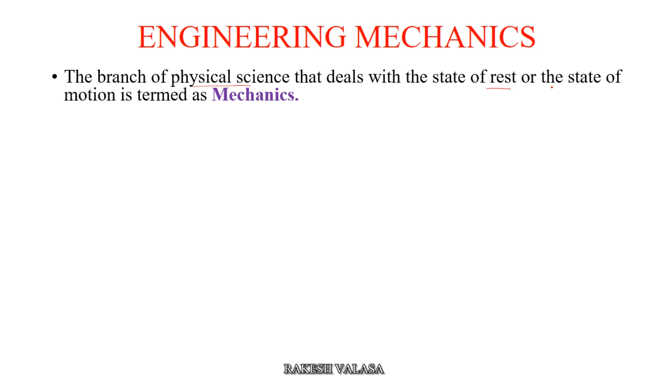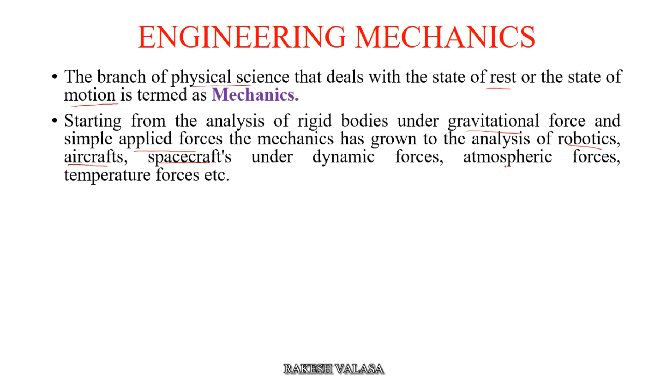First of all, let us see the definition of mechanics. Mechanics is the branch of physical science that deals with the state of rest or the state of motion, termed as mechanics. Starting from the analysis of rigid bodies under gravitational force and simple applied forces, mechanics has grown to the analysis of robotics, aircrafts, spacecrafts under dynamic forces, atmospheric forces, temperature forces, etc.

Archimedes, Galileo, Sir Isaac Newton, and Einstein have contributed a lot to the development of mechanics. The mechanics developed by these researchers may be grouped as: first, classical mechanics or Newtonian mechanics, developed by Sir Isaac Newton.

The second classification is relativistic mechanics. This was developed by Albert Einstein.

The third classification is quantum mechanics or wave mechanics. These mechanics were developed by Schrödinger and Broglie.

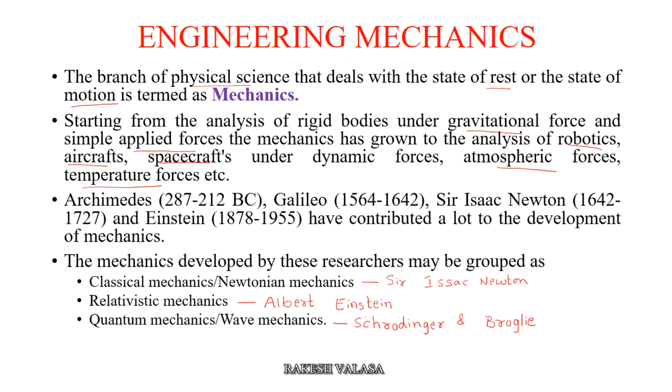Coming to the definition of engineering mechanics: engineering mechanics is a branch of applied science which deals with the laws and principles of mechanics, along with their applications to engineering problems. Engineering mechanics is very essential for an engineer in planning, designing, and construction of various types of structures and machines.

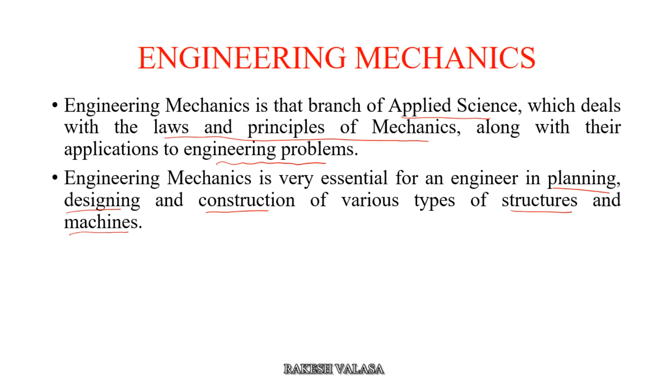Now let us see the classification of engineering mechanics. Depending upon the body to which the mechanics is applied, engineering mechanics is classified into two types: first, mechanics of solids; second, mechanics of fluids. Solid mechanics is further classified as mechanics of rigid bodies and mechanics of deformable bodies. A body which will not deform, or where deformation can be neglected in the analysis, is called a rigid body. So in mechanics of rigid bodies, there is no deformation, so delta x equal to 0.

The mechanics of rigid bodies dealing with bodies at rest is termed statics. Bodies dealt with in motion is called dynamics. Dynamics is again classified into two categories: first kinematics, second kinetics. Dynamics dealing with problems without referring to the forces causing the motion of the body is termed kinematics. Coming to kinetics, it deals with the forces causing the motion. Without considering forces, that is called kinematics. With considering forces, that is called kinetics.

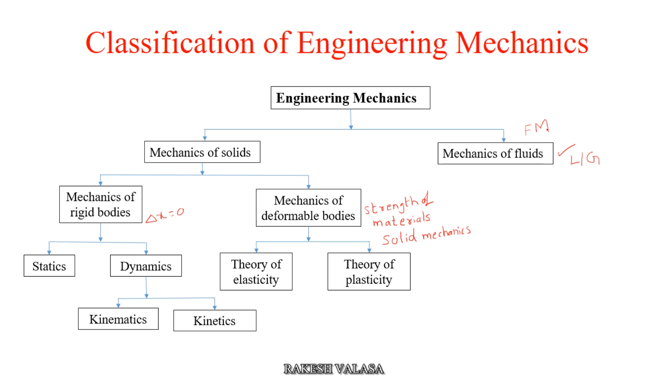Coming to mechanics of fluids: liquids and gases deform continuously with application of very small shear forces. Such materials are called fluids. The mechanics dealing with the behavior of such materials is called fluid mechanics. This is further classified into three categories: first, mechanics of ideal fluid; second, mechanics of viscous fluid; third, mechanics of incompressible fluids. This is a brief discussion about classification of engineering mechanics.

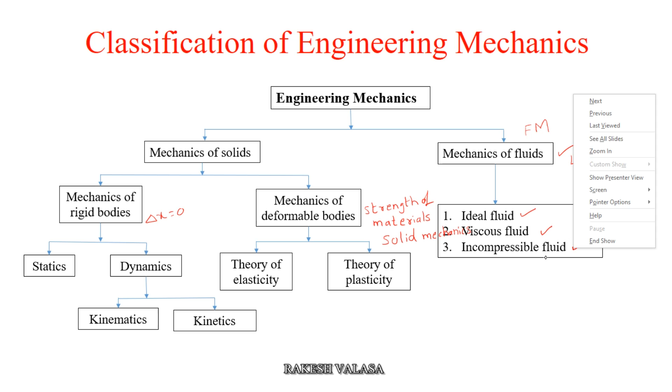The next topic is basic terminologies in mechanics. The first one is mass. The quantity of matter possessed by a body is called mass. The mass of a body will not change unless the body is damaged and part of it is physically separated. When a body is taken out in a spacecraft, the mass will not change, but its weight may change due to change in gravitational force. Even the body may become weightless when the gravitational force vanishes, but the mass remains the same.

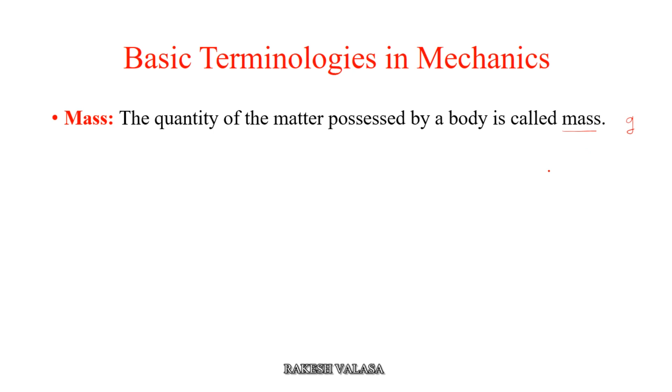The second one is time. Time is the measure of succession of events.

The successive event selected is the rotation of Earth about its own axis. Earth is rotated about its own axis, and this is called one day. To have convenient units for various activities, a day is divided into 24 hours. One day equals 24 hours.

An hour is divided into 60 minutes, so 1 hour equals 60 minutes. Again, 1 minute equals 60 seconds. Okay, this is regarding time.

Coming to the third one, space. The geometric region in which study of bodies is involved is called space. A point in the space may be referred with respect to a predetermined point by a set of linear and angular measurements. For example, if we measure this point A with respect to the predetermined point, this point is called origin. These points are called coordinates.

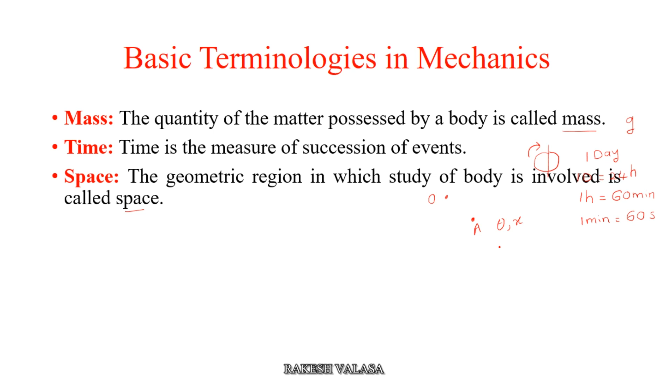The next one is length. It is a concept to measure linear distances. For example, the diameter of a cylinder. Here the diameter of the cylinder is 200 millimeters. Here the millimeter is the unit of length.

Take one more example: the height of a building may be 6 meters or 20 meters. Here the meter is the unit of length. However, depending upon the sizes involved, micro, milli, or kilometers are used for measurement. Millimeters, centimeters, meters, kilometers - these are the units used for measurements.

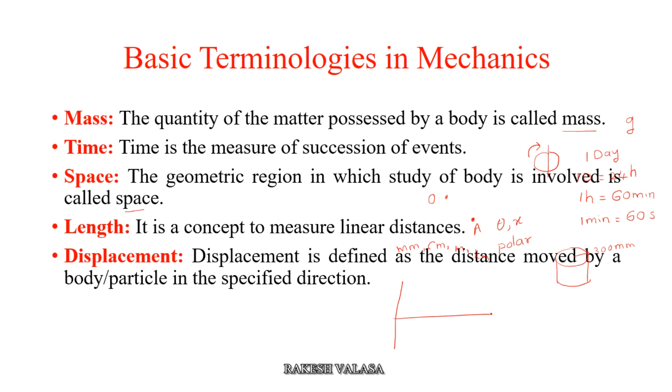Coming to the next one, displacement. Displacement is defined as the distance moved by a body or particle in a specified direction. For example, let us take the xy plane. This is y, this is x. Initially the point is A. This point is moved from here to here - this is point B. This point is moved from A to B.

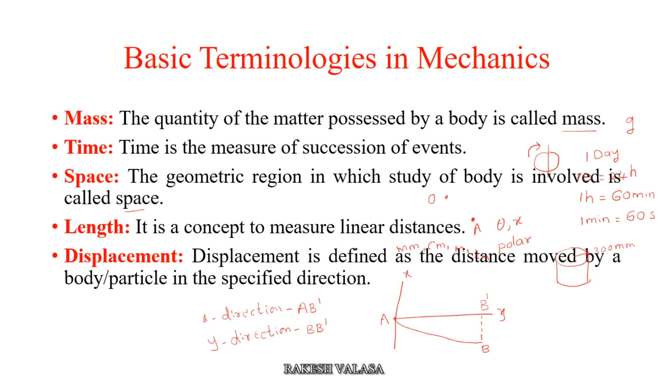Coming to the next one, velocity. The rate of change of displacement with respect to time is defined as velocity. That means velocity v equals dx by dt. Units are meter per second.

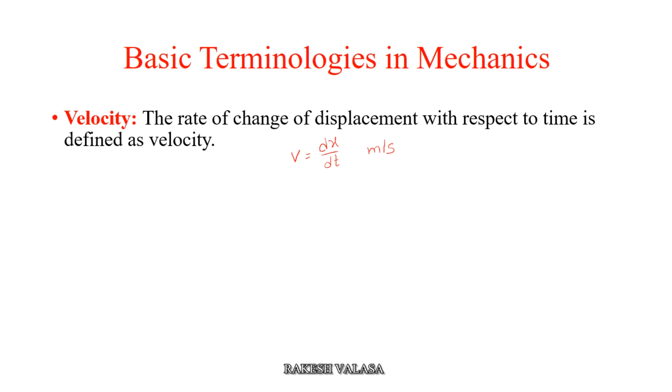The next one, acceleration. Acceleration is the rate of change of velocity with respect to time. So A equals acceleration, A equals rate of change of velocity, dv by dt. These units are meter per second square.

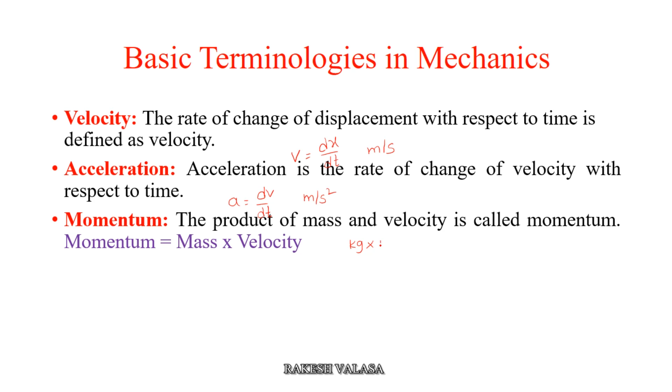Next one, momentum. The product of mass and velocity is called momentum. Momentum equals mass into velocity. Here mass units are kg, velocity units are meter per second. You can also write Newton second, because Newton units are kg meter per second square.

The next one, continuum. A body consists of several matters. Each particle can be subdivided into molecules, atoms, and electrons. It is not possible to solve any engineering problems by treating a body as a conglomeration of such discrete particles. The body is assumed to consist of a continuous distribution of matter. In other words, the body is treated as a continuum.

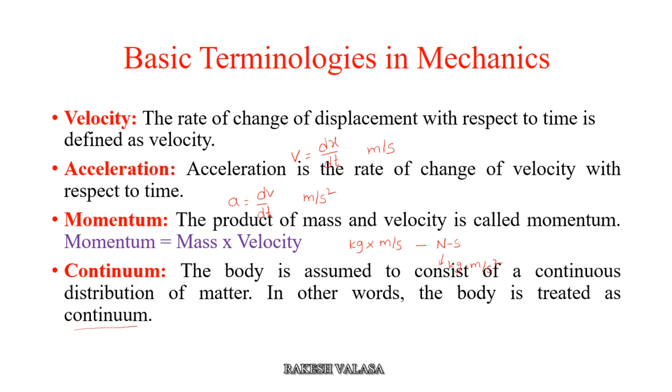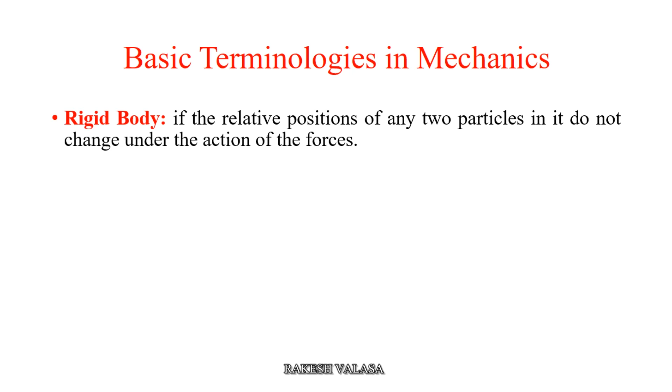The next terminology is rigid body. This is very very important. A body is said to be rigid if the relative positions of any two particles in it do not change under the action of forces. For example, I am taking one body, that is one object.

Here I am taking the same object after applying forces. Initially the points are A, B - the initial position. After application of forces, the position changed in this way. Here I am applying the forces: this is F1, F2, F3.

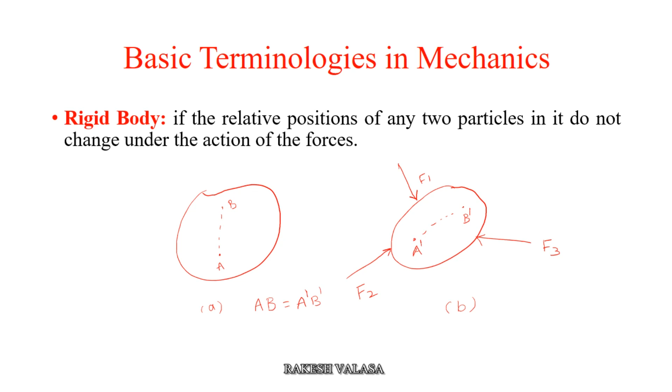You can see these two figures, figure A and figure B. In figure A, points A and B are the original position of a body. After application of a system of forces F1, F2, F3, the body takes the position shown here. The new position is A dash B dash. If the body is treated as rigid, the relative positions of A dash B dash and A B are the same. That means initially the distance AB equals, after application of forces, the distance A dash B dash. These are equal - that type of body is called a rigid body.

The last definition, particle. A particle may be defined as an object which has only mass and no size - this is very very important. The object which has only mass and no size, such a body cannot exist theoretically. However, in dealing with problems involving distances considerably larger compared to the size of the body, it may be treated as a particle without sacrificing accuracy.

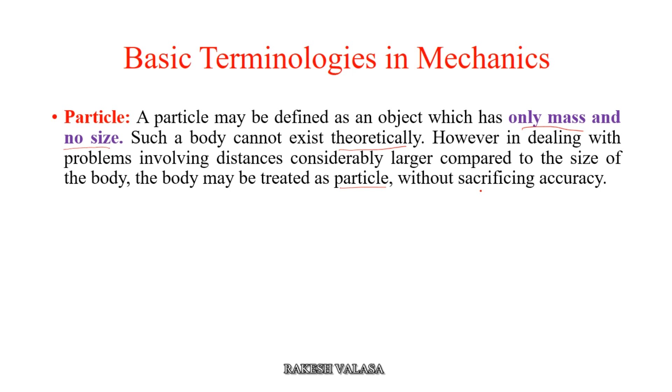Let us see a few examples for particle. The first example: a bomber aeroplane is a particle for a gunner operating from the ground. Second example: a ship in mid-sea is a particle in the study of its relative motion from a control tower. Example 3: in the study of movement of the earth in the celestial sphere, earth is treated as a particle.

Okay, this is regarding basic terminologies in mechanics. In the next lecture we will be discussing laws of mechanics.